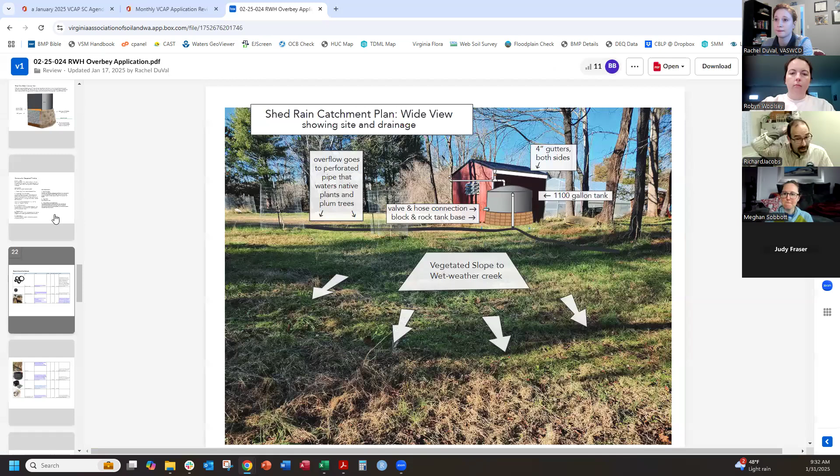Yeah, I went ahead and just took a quick look at this, and the biggest concern I have is the one on the shed, because it's kind of an oversized tank, and then it's elevated, and I think we've had at least one other tank this size that was maybe elevated or had some sort of foundation wall, but because this one's completely elevated off the ground, I was just worried that it wasn't safe enough, didn't have the structural support underneath of it. So for design purposes, I think we have to assume that the tank is full when you're designing the foundation.

I'm not sure if this tank will ever be full, considering that the shed is only like 160 square feet. And I think that only comes out to be about 100 gallons for a 1-inch storm event. So at 1,100 gallons, we'd have to get 11 inches of rain, or not use it. So I guess the likelihood of it being full and having the full load applied to it might be low.

But yeah, definitely the design here, I was just questioning the cement fiber panel sheets, which are also included in the material list and cost estimate, don't seem to be rated for structural loads. I think it's just a paneling material. I guess it's a link to Lowe's, so it looks like it's a panel that you put on the wall of your bathroom to protect against moisture, not necessarily as a floor. So that's one observation for that particular design.

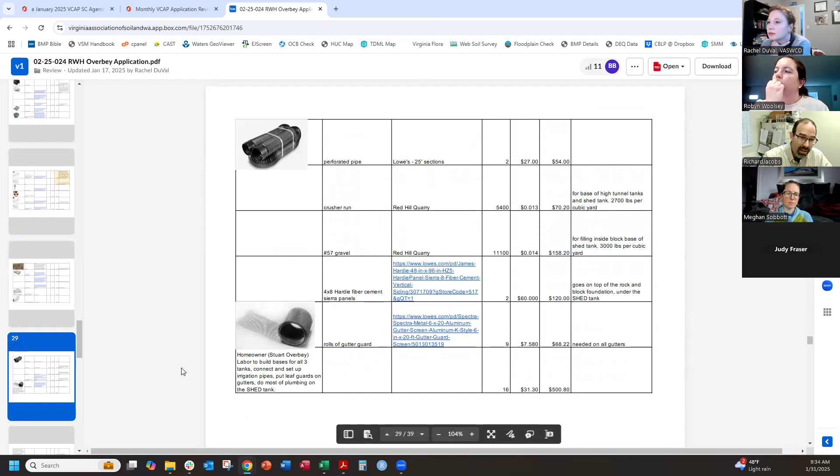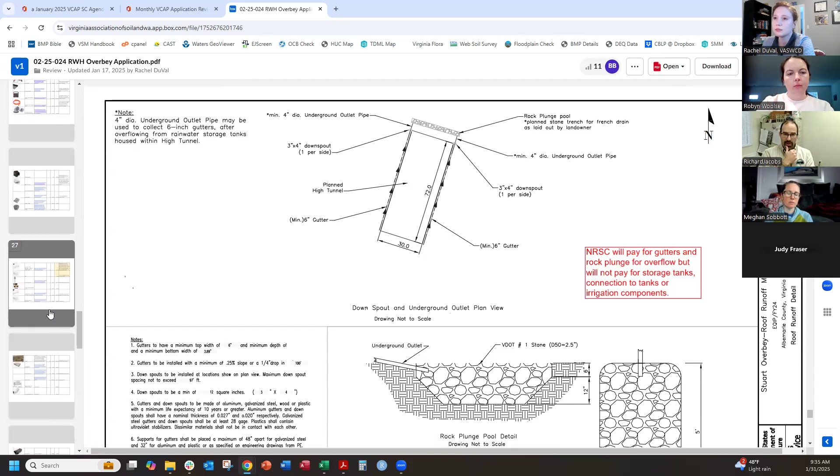And then even the ones that are rated for the floor seem to indicate that they still need some sort of metal structural support. And then the landscape blocks, I just can't say whether that's strong enough for the support. So definitely a different cement board if they're going to keep it elevated, but my preference is to just put it on the ground. I don't think that would affect their use of the water. They would just have the hose and everything down at the bottom, and still be able to gravity feed out.

Yeah, Richard, I had the same concerns exactly. I looked at the block and they're used for retaining walls. I don't know in this kind of circular setup with this kind of load on top. I've just never seen it before. I would want to make sure the manufacturer of those blocks is on board with this use of them and maybe get their engineer involved.

But yeah, I think the cement fiber board will just be pretty much buckled and popped when that load goes on it over gravel. So it's not going to do anything if it is used, it'll just be probably somewhat destroyed. And I don't know why it would be there. It's a really heavy load, like you say, if it ever gets full.

And maybe this goes into the survey, but we do still have these things should be emptied every 7 days. And so the program practice was not created, I don't think, with this intention. It may be fine, but it just does seem to not be relevant to the intention of the program as such a huge tank. But I had one other thing and I've forgotten.

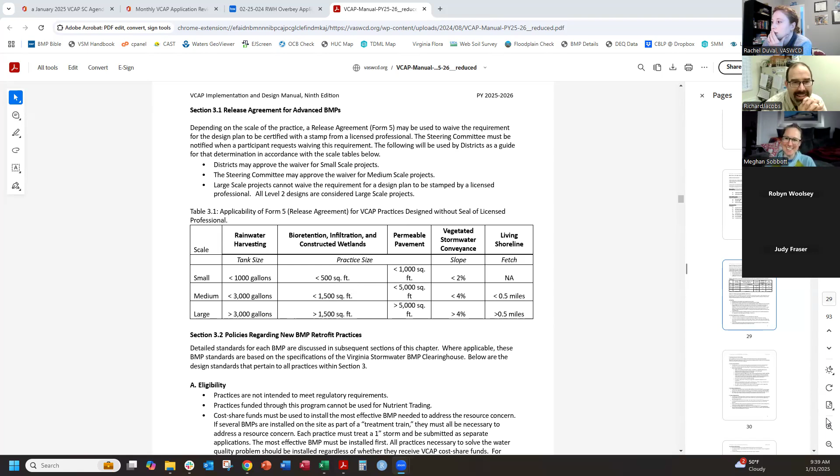I would think that you wouldn't really want it inside either because it takes up your garden space. Right, exactly. Who might argue? It's a big hoop house, so it's not for production, it's for home. I'm pretty sure she's using it just for herself. I think she's not selling agricultural crops.

Yeah. So I mean, it's right there at that threshold where typically we would need to approve the medium scale projects. Oh, there we go. Okay, so that's not as significant. So yeah, on the ground, I'm comfortable with approving the waiver. So table pending redesign to be on the ground and provide a Form 5, or conditional approval.

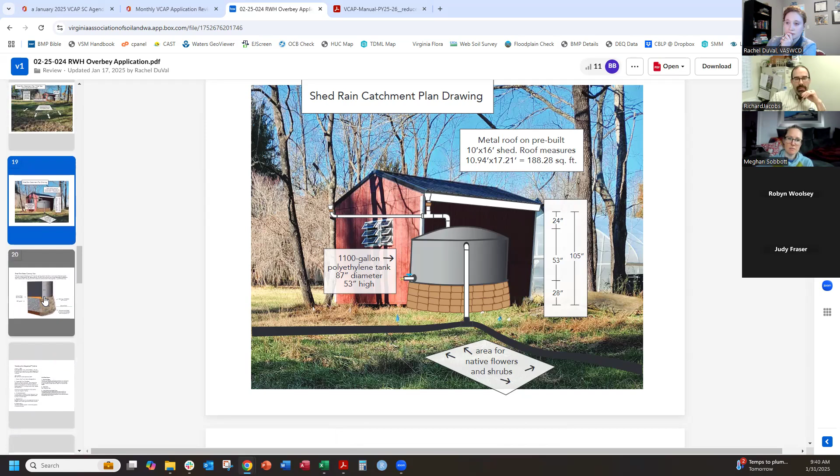Can I ask a question? If you do need a redesign, is a statement saying tank will be placed on ground with 57 bedding stone sufficient as a design, similar to the ones that are inside the hoop house, as opposed to her having to resubmit or redo a form or a diagram? I think regardless, we would need the Form 5 in addition, signed. But yeah, if it can be designed just like what's inside the house, I think that would be. Okay. Yeah.

Okay, so the question is, does it need to come back to the steering committee if the third tank is just going to be basically designed like this and a Form 5 is provided, or is conditional approval sufficient? I'm okay with conditional. Any other thoughts? Yeah. So as long as they know that they can't move forward until the Form 5 is signed, I think that. Yeah.

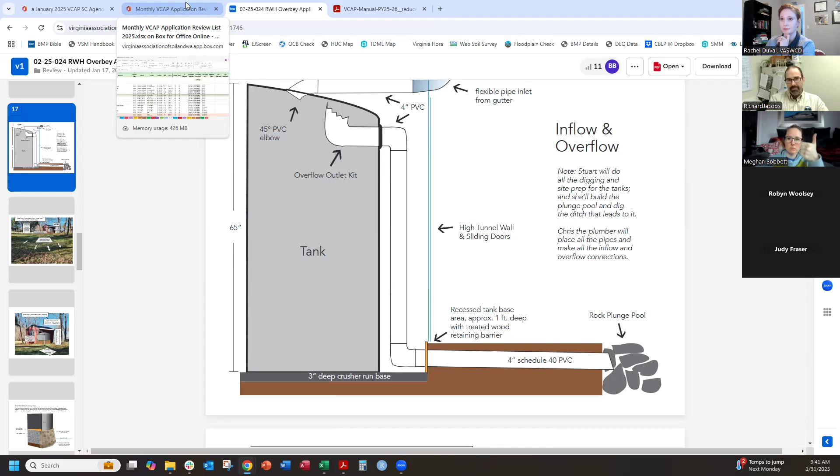See if this breaks everything. Okay. Woo. I actually haven't moved anything on this yet, so that was a little stressful. Okay.

All right, so the next, I'm gonna kind of say two in one because this rain garden and this permeable paver project are quite literally right next to each other. The reason I pulled this is mainly a least cost, technically feasible question. The rain garden is situated here, and the permeable pavers are right next door. The rain garden is treating this section of the roof, the permeable pavers this section. The rain garden is very oversized. It'll be beautiful.

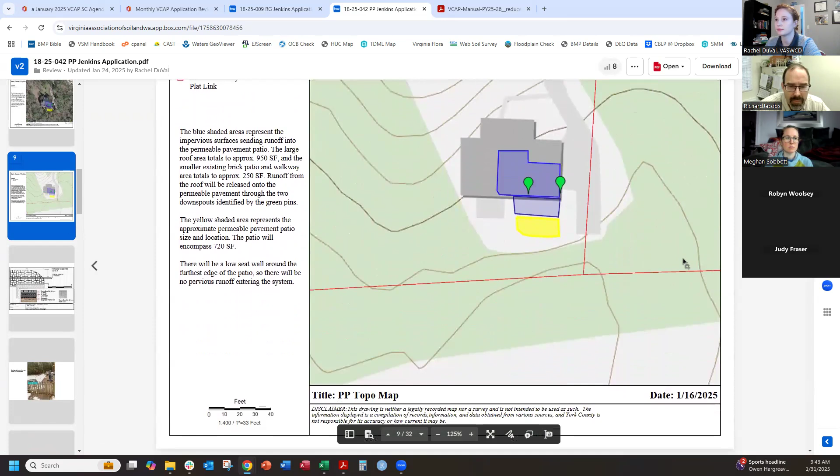But it's sized enough to actually take all of the back roof. So the question really is least cost technically feasible. Do we fund both of these projects or do we say pick one? I'll pull up the other one as well so we can compare. This is the permeable paver project. This is the rain garden.

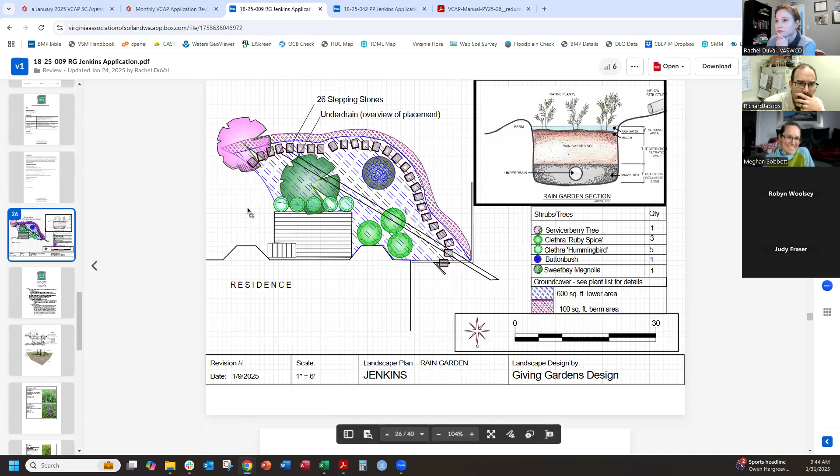Hey, Rachel, what's the concern with funding both of them? The concern is in our manual, and our manual doesn't phrase it like this, but the least cost technically feasible aspect. Are we utilizing the money in such a way that we're getting the most efficient BMP that can treat the resource concern without spending excessive funds on two separate BMPs? Can one BMP treat this?

So functionality wise, there is really no concern with either BMP, and it would look very beautiful. But the question is, does the steering committee want to fund both projects when one could feasibly treat the resource concern, which is excess runoff from the roof and a little overland flow? Sorry, looking at one of those pictures, it looked like one would be treating one side of the house and one the other side. Somewhat. One is treating one half of the back of the house, and the other the other half. But they would both be treating a separate part. Yeah.

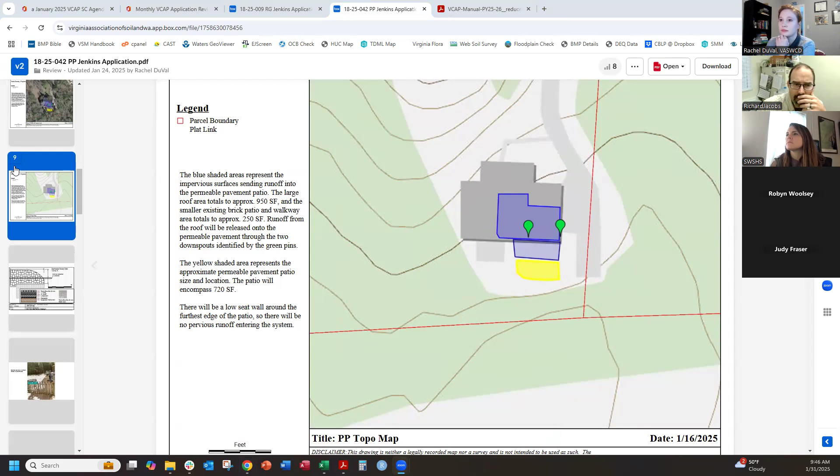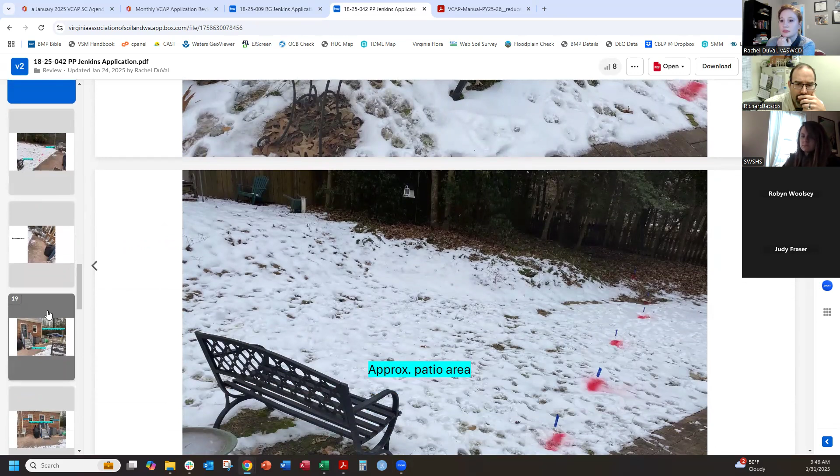Yes. So again, there's nothing intrinsically wrong. It's a question of where we want funding to go. Yeah, from what I can see, and correct me, Rachel, it seems like it would be challenging to get the water from that right side of the roof over to the rain garden. It would involve piping it under their patio and over. I don't know the grade, so maybe it's going against grade. So if they're two distinct downspouts and locations, I think it should be considered reasonable to have two separate installations. And they've got the deck in the way. Okay. Yeah.

So it kind of makes sense to me what they're doing. Just having two separate, if they did two separate rain gardens, or I guess I'd be pushed if they were both permeable paver projects on either side of a deck, but as it is, I think I'm okay with it. Yeah, I agree with Judy. I think sometimes you have site restrictions that are hard to see from photos. That might make it the best option.

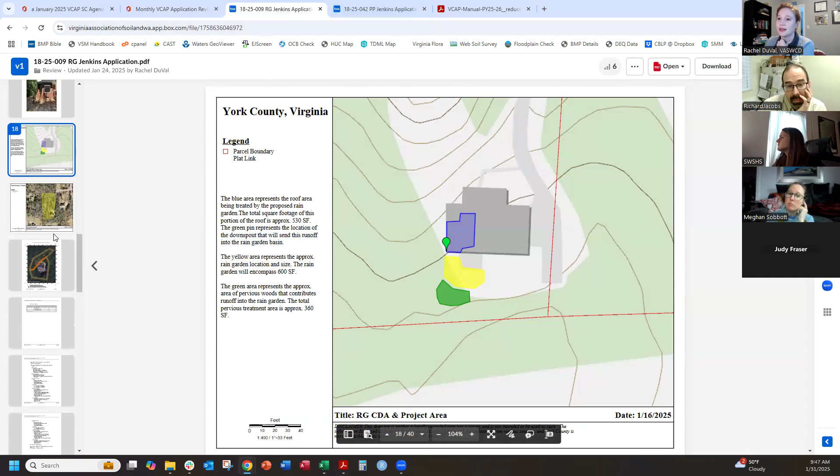Okay, perfect. And yes, just to clarify, the reservoirs are not connected to each other. This is not a treatment train, separate entities, separate drainage areas, all that. Okay. And then I guess for the size here, how big should it be versus what they're providing? On the drawing it says 600 square foot. Yeah, it's huge. I think they only need, oops, I don't know why that happened. It is a 600 square foot ponding area.

They basically just want the landscaping, yeah. They want the resource concern to be treated with a rain garden, but also to fill out. And there are definitely lots of plantings in it. Yeah, so I see that. So I think my only concern, looking at the drawing, is the proximity to the house. They need to maybe exclude the area next to the house because it should be sloping down away from the house at least a little bit. As it's shown, it sounds like the ponding will be up against the foundation. Does that make sense? I can see that.

So maybe we just have to tell them that there needs to be a separation from the house foundation to the ponding area. I don't know how big that deck is, but if the deck is 10 feet wide, then having it 10 feet away from the house would be ideal. So any landscaping up against the house wouldn't be part of the practice. So the depressed area would be 10 feet away from the house. Sorry, Richard, the three bigger green circles would not be ponding areas, and everything else could be those ponding shrubs. Yeah.

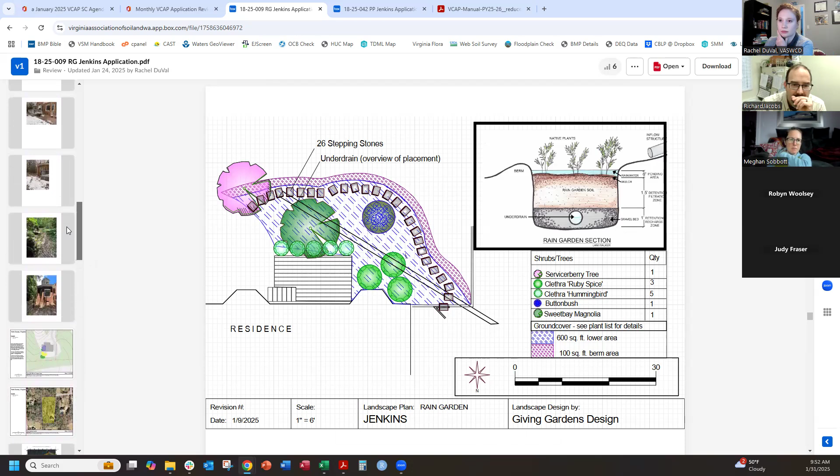But both of these practices are treating the same resource concern? Yes, excess runoff, just different contributing drainage areas. Some of the pictures are snow covered, so it's hard to see what the ground cover is like. It's not really a lawn space. It's mostly weeds, general turf weeds. It's pretty shady back there, a lot of water, so just a poorly performing yard. So the pavers are intended for excess runoff, and the rain garden provides vegetated cover as well as addressing runoff. Those pavers we're looking at are staying; the new patio is in the grass beyond it. Existing patio to remain.

But I think generally, since it's oversized, we should reinforce the 10-foot setback from the foundation, and not pay for any foundation plantings within that zone, and then have it depressed 10 feet out, and that would be fine. Was the infiltration rate pretty good here? No. Robyn, correct me if I'm wrong, I'm pretty sure it's terrible. That's why they have underdrains in both. It's real bad, 0.2 inches per hour on the sizing spreadsheet. So it's a media-filled rain garden.

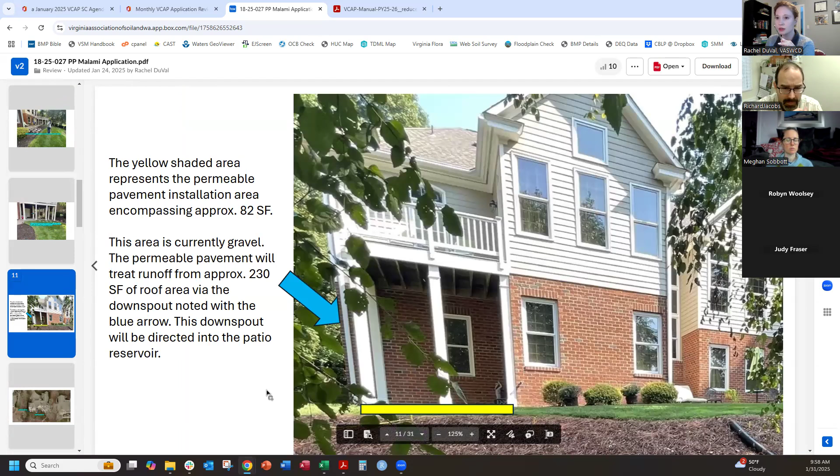So around the edge of the reservoir, where it abuts the foundation, they do have an impermeable liner or non-woven geotextile. But in this area in particular, and I think in the front as well, there are posts and they are set in concrete, but the idea is that they would like the reservoir to go kind of around these. So thoughts about that?

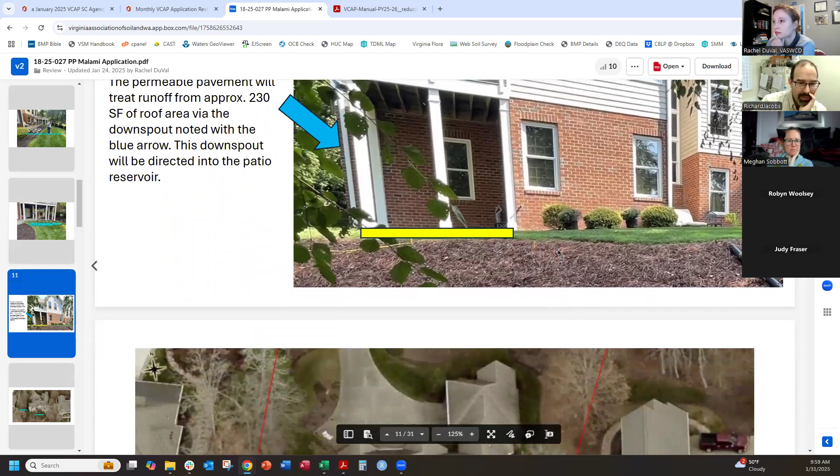So the pavers themselves are going to extend under that, right? The drawing was kind of. But not the pavers themselves. The entire reservoir is planned to be in the paver area, so underneath this portion here. So they're excavating around all those columns for that deck to put in a reservoir. How deep is it? But there's no pavers on top of the reservoir.

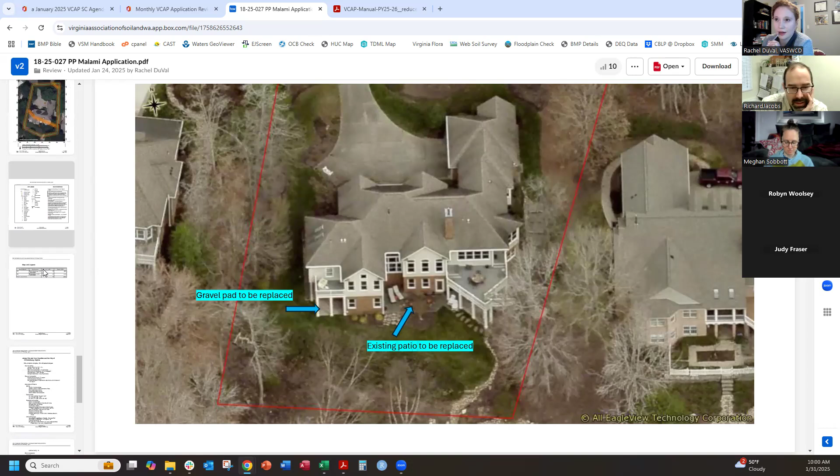Yes, there are pavers on top of the reservoir. Okay, so they're going to extend the pavers under the decks. Just worry about compromising the footings of those columns. But actually, I'm sorry, I'm scrolling so fast. And is there water coming through the deck?

It is, Robyn. It's going under the deck because that's where the downspout from the roof releases. So that's the main resource concern there. There's probably some water coming through the deck, but that wasn't the real issue. Okay. I know some of these elevated decks have internal drainage systems, so I wasn't sure if there was a separate downspout for the deck. No, not that I was aware of. Okay.

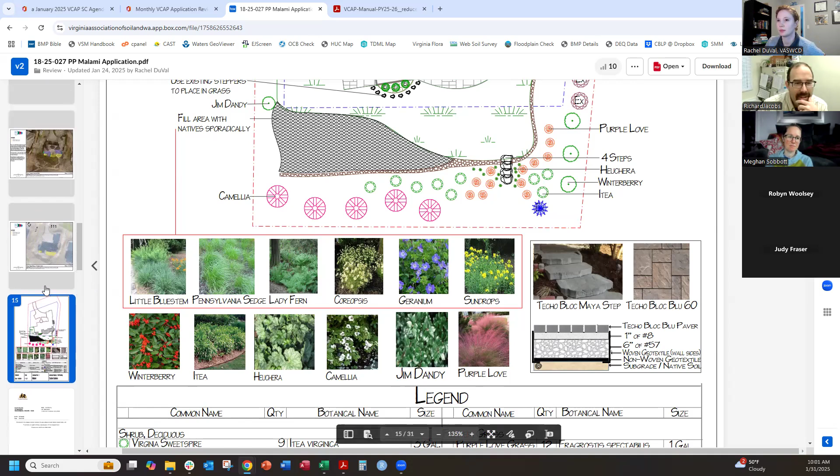But, I guess it could be done, but I mean, the reservoir is under the whole thing, right? It's not just being shunted under the deck, right? Correct. Hmm. How old is this house? Well, big.

I'm always a little leery about decks, honestly. I think typically there have been questions about this type of reservoir around a deck or under a deck before, and it was just wooden posts. So this is a little different because they're wrapped in concrete, but they're not just putting the pavers on top. They're actually going to dig into the existing gravel underneath.

It would just be a lot more comfortable if they just piped that downspout to the area where they can excavate without endangering. We don't know how deep those footers go for the columns. If it was built at the time of the house, they're probably 2 feet down, and maybe it's not going to be an issue for a 4-inch. I just wouldn't do it myself. I'd pipe the water beyond.

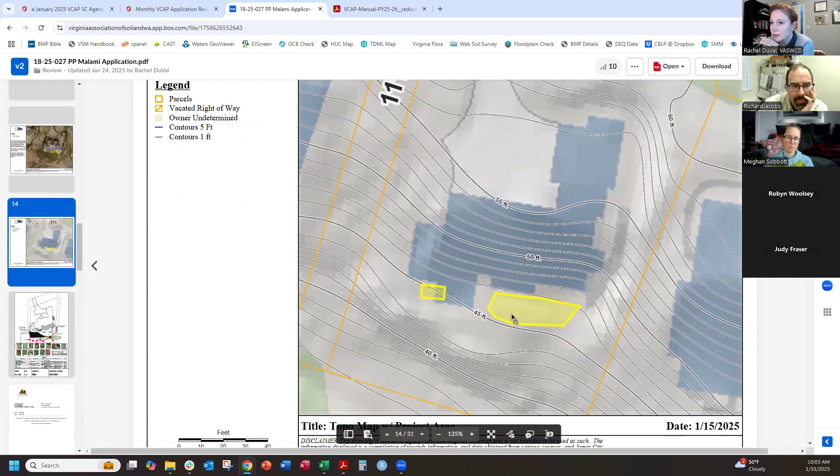To kind of this area where they're... Yeah, I mean, it's a big, right, this side. Yeah, just the reservoir area just not be under the deck. Not that it can't infiltrate or put pavers on it to make it look continuous. And I'm sorry, I missed how deep their reservoir is, so they're going down 10 inches. Yeah, 9, 10 inches.

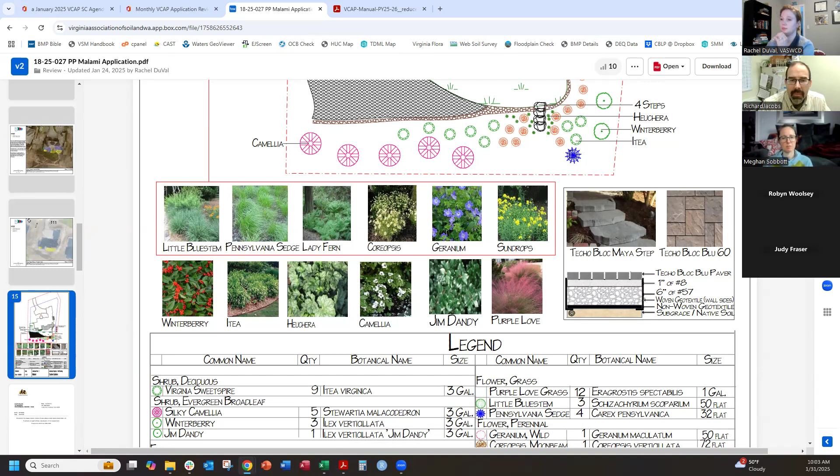I mean, there should be footers that are 2 feet deep anyway for the deck. So that's going halfway down, removing the soil from around those columns. They're signing a Form 5, so they're taking that liability on themselves, but I wouldn't do it.

That middle roof area is just piped somewhere else, I guess. Yeah, that's funny. Where does that go? They didn't have a direct downspout on either of those little sides of that roof. I forget what you call that. So we just didn't count it because it wasn't going to be directly into the reservoir. Probably ends up there. That's a safe assumption. It's got to go somewhere. Probably just rolls off a little more dispersed than the downspouts. Okay, but I guess the reservoir, that middle portion is also.

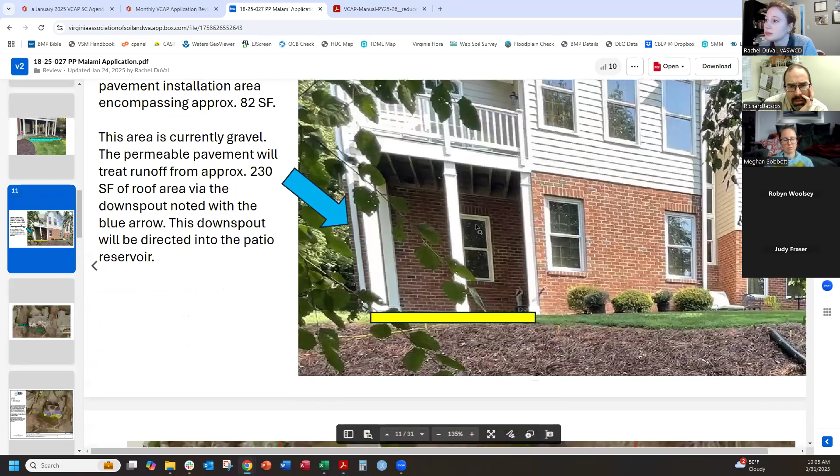So is there a basement on the back, or is this the walkout basement side? So can you go back to the pictures? I think it's just a walkout. It sort of feels like it would just be, yep.

Sorry, you said basement. I was like, we don't have those in Williamsburg. No.

Yeah, so there's not a subterranean wall that this is going along or anything, so I think it's fine. The barrier between the wall and the reservoir though should be impermeable. That is noted.

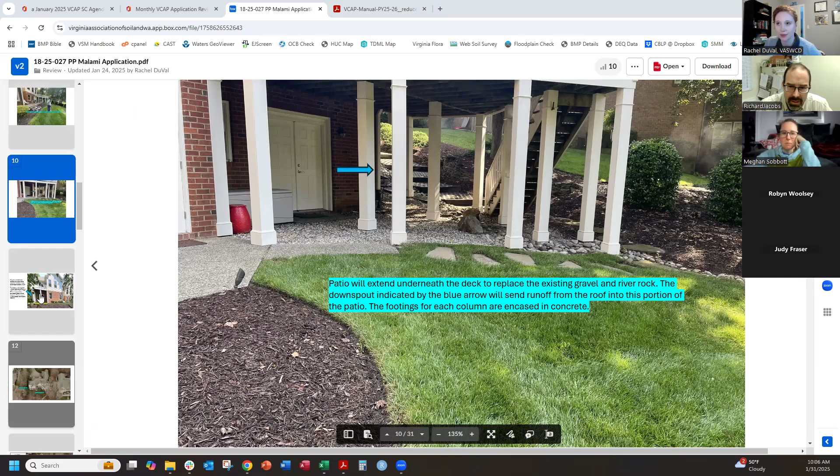So my question is, what are the recommendations to take back to the homeowner? Is it to stop the reservoir? This is hard. Hold on, let me find this picture. Put the reservoir in this area and just use pavers to match here to avoid digging around the posts. Would that be acceptable? And does that require coming back to the steering committee or not?

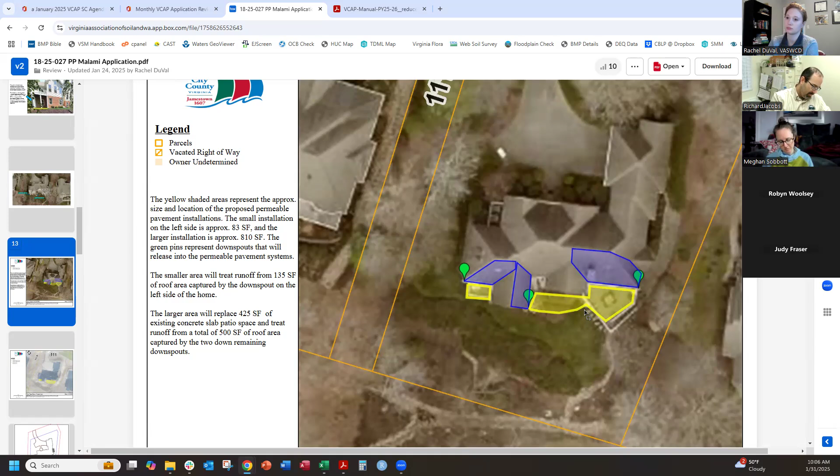Well, again, they're submitting a Form 5 with this, so they're acting as their own engineer, and I don't think it's our place to, well, maybe it is our place. We require the Form 5, but I would say the best solution would be to suggest that they size that central area for a reservoir that will accommodate the roof runoff and pipe it over there. But that would mean coming back with a slight redesign that also maybe includes those other little gable roofs.

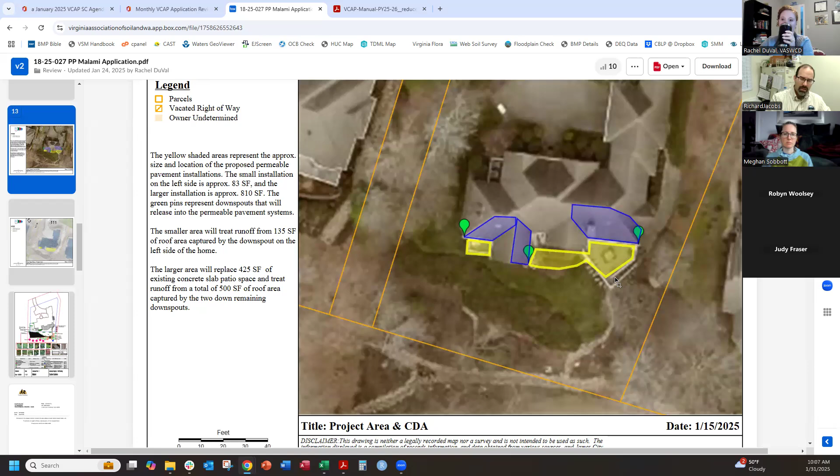But if they are determined to do it this way and feel very confident they've got 10-foot deep footers under those columns and whatnot, then that's where the Form 5 comes in, and they could go ahead. So I guess, I don't know, would that be conditionally approved with that recommendation?

Given that, if they want to proceed even despite that concern, that's their choice. I see Richard thinking. Yeah. I mean, we've paid for under decks before. I don't know. It's not so much that it's hitting the pavers in this case, it's what's being piped from the roof. So, yeah.

We can do a dry well under the deck. Please no. No, but the dry well would go deeper than the pavers, so that would be even more of a concern for the foundation. I mean, the posts of the deck, I would imagine, go down at least 2 feet. And they're only going down 9 to 12 inches, because there's 3 inches of pavers, some bedding material, and then they go down 4 to 6 inches more. That's going to be 9 to 12 inches.

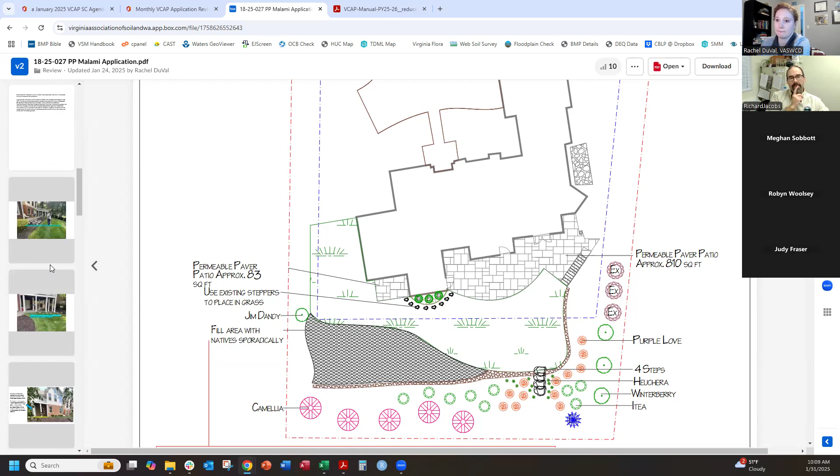It is gravel now, right? Yes. I wonder how deep that gravel is, because if they just take out enough gravel to put in pavers so they line up and it's just not a reservoir, it's not that big an area. Yeah. I just don't see a real issue. Just say move the reservoir, kind of like with the rain garden on the last one, out of that critical area. It's still going to have gravel, still pervious pavers that water will flow through. It just won't hold water down there. And they won't have to excavate that deep. I hate to speak for a landowner, but I think they'd be fine with that.

Would that be excluding the area from cost share, or just making it shallow there? If we're going off of precedent, since there is nothing in the manual outlining how big the reservoir needs to be in proportion to the surface area of the pavers, we would pay for those pavers as well. Well, I think there is a minimum depth for the reservoir in the manual. Yeah, it's 4 inches.

But I think maybe the downspout should be piped into the main section away from those footers, away from the deck. Is that what we're recommending, that the downspout would be piped all the way over to the other side of the deck? That's what I would think, given that if it can hold that water, then it just gets away. That was their concern. Okay. It sounds like Robyn was saying that they don't want that water under there.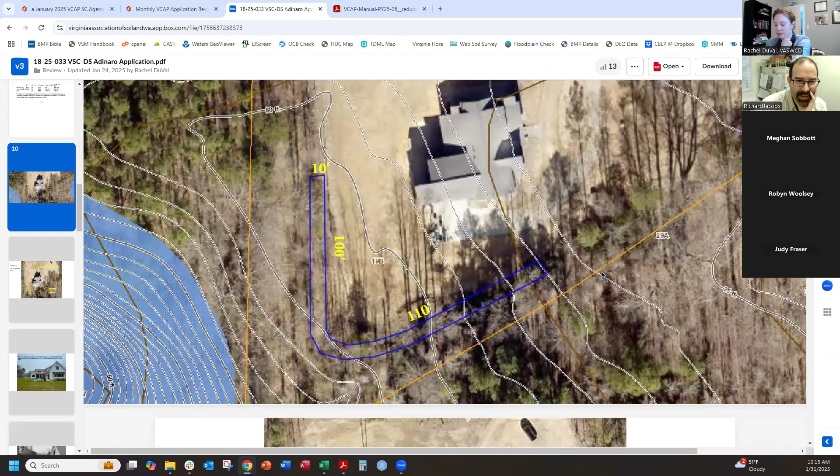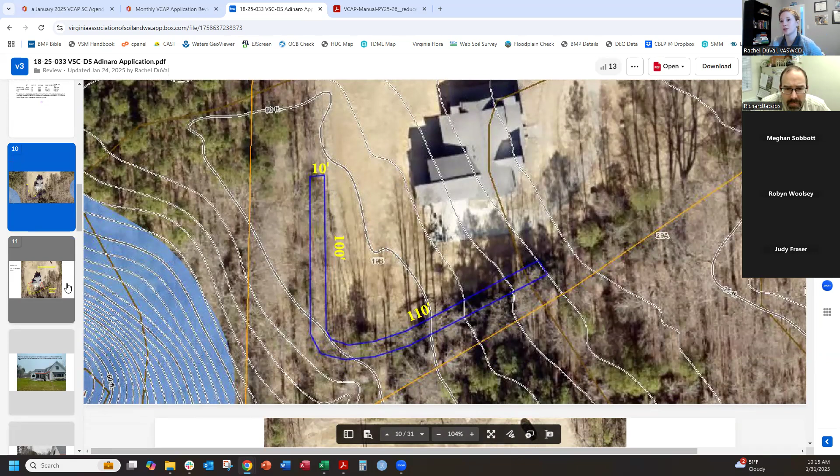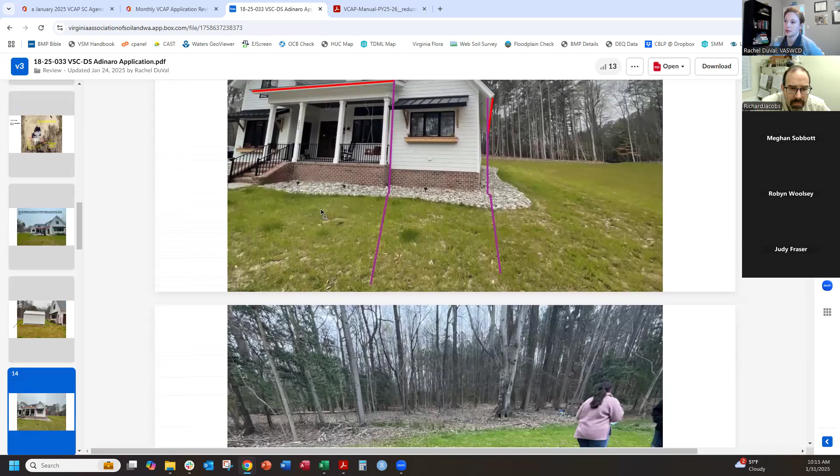So this is one that came. This has gone through a couple of iterations, but this is a dry swale that will be this. It's proposed to be this kind of bending area, the whole length of the swale. This is the swale itself. It's taking downspouts from multiple downspouts in kind of different areas. The cross section, let's see. Sorry. Okay. This is kind of the cross section here.

So 2 foot wide, I think they call it a drainage ditch. It'll have an under drain in it, choker stone, filter media, and then slope down. It'll be collecting those 4 downspouts, and it's going to be seeded with, I think, turfgrass. Again, it's gone through a couple of iterations, so there's some confirmations that are needed, like the fabric needs to be non-woven. It doesn't specify that. The filter media, confirming what that is composed of. And then,

Robyn, I'm not positive if they decided to put in a final weir or not. Sorry, I cut you off. No, go ahead. I'm sorry. It was a little jumpy. No, it's okay. Forgive Colonial District this month, you all. We had some challenges.

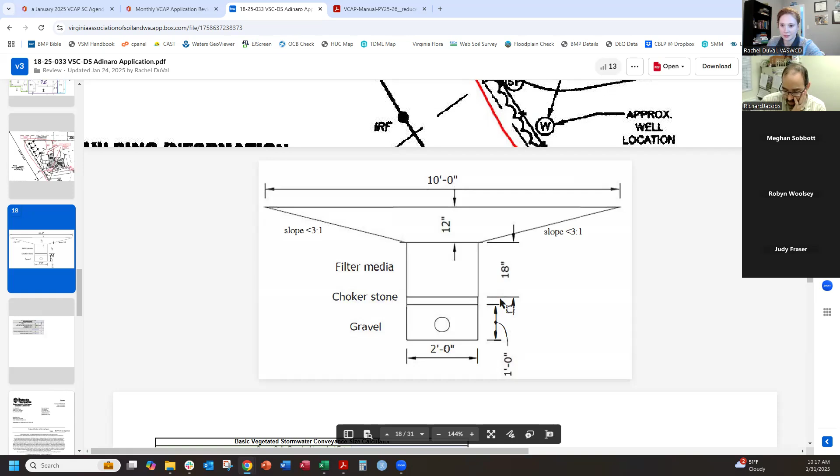As it stands currently, the landowner does not have a final weir proposed. His reasoning is that the swale itself is so oversized that the amount of overflow is extremely limited, even in large storms. So he doesn't have one in now. We've talked about it. He said if he really has to, he will. I don't know why this is the hill he's chosen to die on, but that's where we're at. Thank you, Robyn. You're welcome. I'm sorry, I don't know a thing about swales.

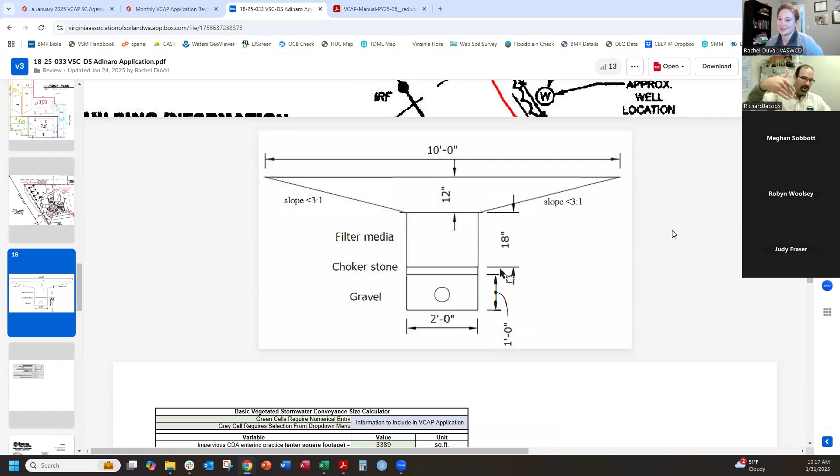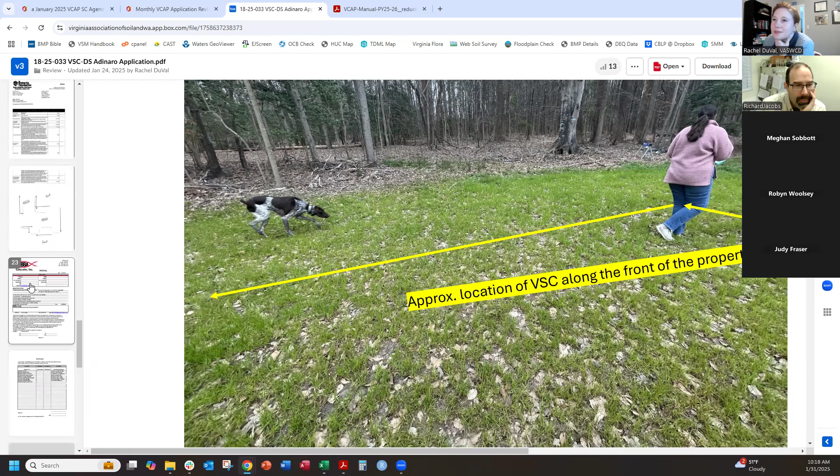No, don't apologize. And the slope of the channel is pretty flat then? Yeah, very flat. Do they discuss how much fall they have? The one I did had very little fall, so we barely made it work. So I wasn't sure if this was the same way, whether you had like 6 inches of fall or if you have more. I don't think that was shown. Let me scroll. Yeah, I don't think he has that specifically. He was just going off the clearinghouse spec of having the correct slope percentage when it's installed. I think he refers to the spec, but I'm not positive. Maybe here.

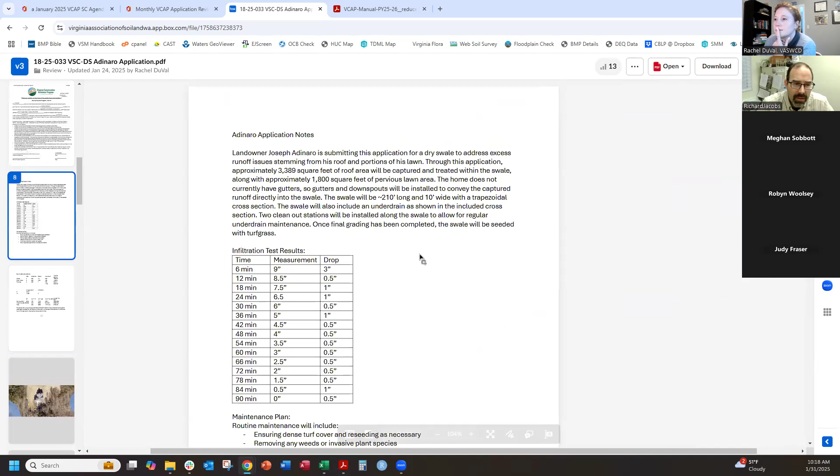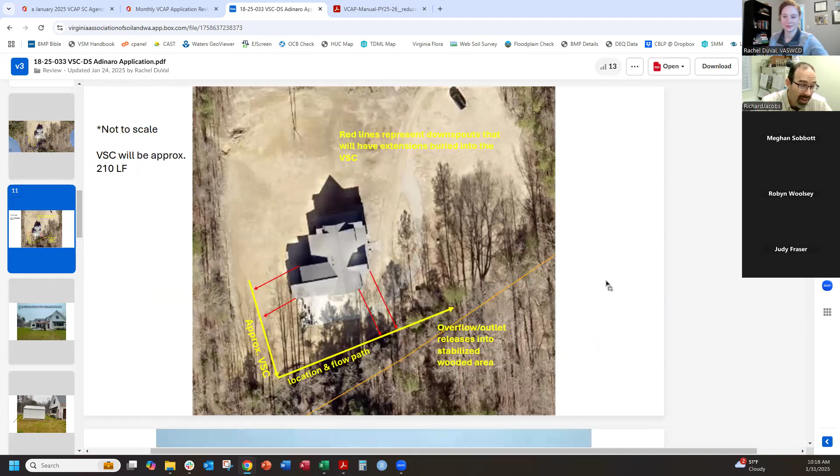And did he do a lot of the design himself, or was it the contractor helping him? No, he did it himself. Form 5 is included. Yes, it is. Is he building it himself too? I think it's going to be a little mixture. He's got a contractor to install some gutters. I think he's going to maybe rent some equipment and try to do some of the excavation himself, but not entirely sure if he's got someone else in mind to come in and finish it out. Yeah, there it is. Okay, ABBA concrete.

So, guidance wise, and again, Robyn, please say stop. No. Effectively, this came through in November. It wasn't particularly complete. There were some things missing. Went back and forth with the landowner, and he doesn't really want to change certain things, like adding in a final weir. So mainly, Robyn, how can we support you, what feedback do you need so that you can take it to the homeowner and make progress on this? That was kind of a statement, but mainly a question. Robyn, what would you like to see with this application? How can we support you in moving this one forward or not?

Yeah, I think a traditional steering committee review is great. I think we just got to the point where he wanted it to get to the steering committee to get whatever feedback you may have. Certainly he wants it to be approved. He wants to proceed. But really, I just wanted you all to see it, review it. If you've got feedback, I'll take it back to him, whatever's best.

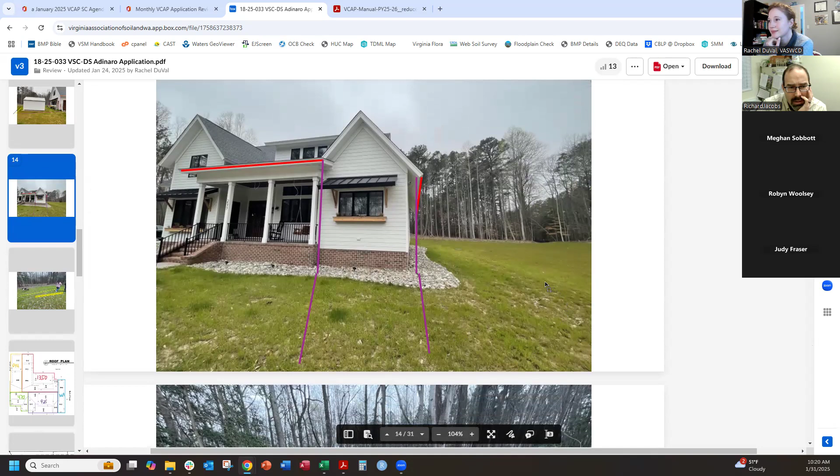So he's adding downspouts and channelizing flow that isn't currently channelized. Am I understanding this right? He is definitely adding downspouts and extending them into the swale. So there's not a swale there now. There's not a natural flow there now, or I mean, the property is graded such that in a huge storm, I think you'd see water moving that way. But he just wants to have an opportunity to take that water from the roof and move it into that swale to keep it on the edges of the property.

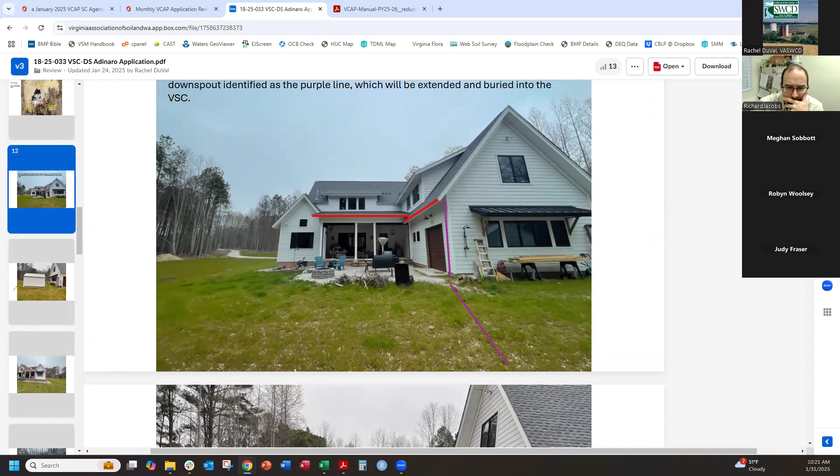So I guess my first question would be, is this the most cost-effective approach from the program perspective? Seems like he's got land and area to manage that water in typical situations. I'm not quite sure why the VSC is called for here, given that it's a fair amount more expensive than other options. Robyn, would he be opposed to something like a dry well instead? I would imagine he doesn't necessarily want plantings, but he might.

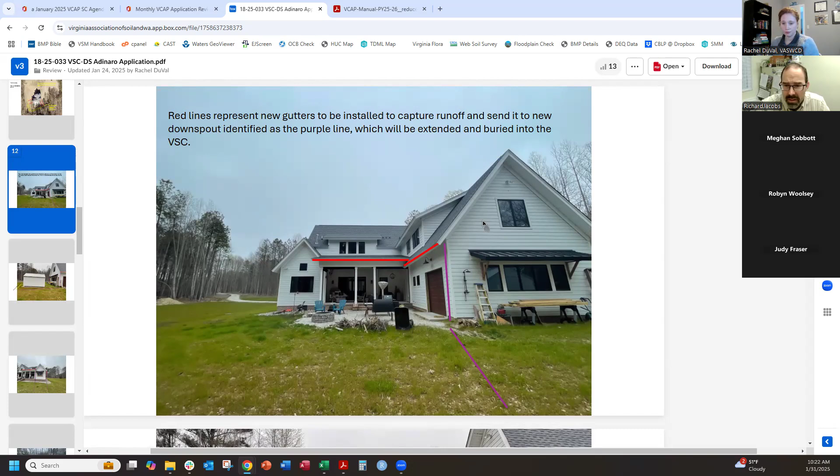I don't know. Yeah, we had initially talked about a rain garden or several rain gardens around the property to try to address these different areas. And it really doesn't seem like he is interested in that vegetated of a practice, because he's just seeding this one with turf anyway. And then I don't know that he has the depth to water table for a dry well. Okay. And just conservation landscaping of a very low maintenance type wouldn't work for him? He doesn't want to put any plants in the ground. I don't know. He got taken with this idea of making a swale of some kind. Yeah, he loves a swale.

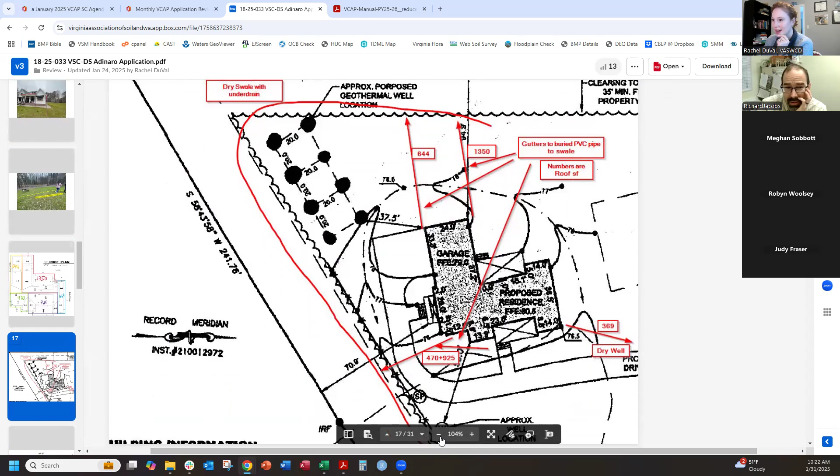So there's a drawing here that shows an existing swale, right? Was that never built? Because that looks like the construction plan. I genuinely don't know. I'm sorry, where are you pointing to, Richard? Well, on this construction drawing, it looks like there were supposed to be existing swales. Where are you talking about? On page 17, you have this plat and there's contours. Looks like there's a swale going off to one side, a swale going off to the other side. Like this one? No, not the red line, but those V shapes. I see.

I don't know. I mean, nothing was particularly obviously a swale on site, so I'm not sure. Sorry, go ahead. No, it's okay. I kind of see it as very gradual. It's very flat, but basically the ground is graded up to the house, and there's a little bit of a light swale on that area. It's not nearly that distinct as shown in the drawing.

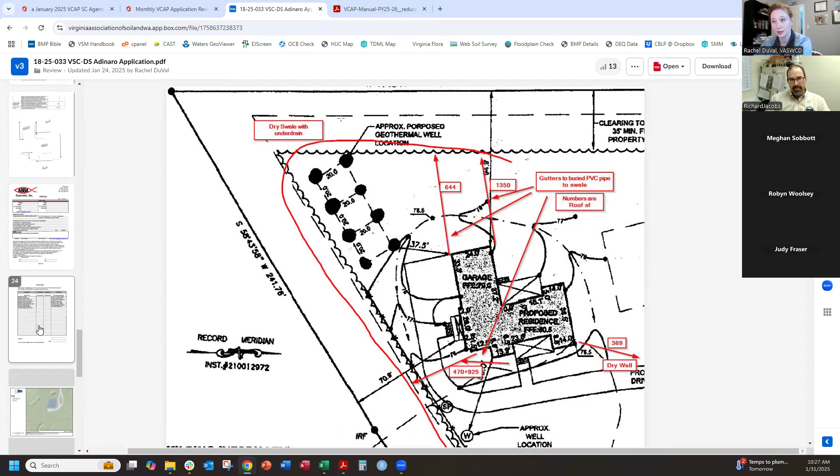But we have required density and minimum ground covers. Am I misunderstanding that? Suggested spacing, so yes and no. We never updated the VSC spec, which is on the agenda for the remainder of 2025. So we're kind of yes and no. But we haven't really approved any swales that were grass lined. Usually they would be sedges or rushes, something other than just turf grass. Okay. And then there should be a check dam, at least at the outfall.

Yes. I just don't think it meets our criteria. So it's questionable whether it's the right practice, and it's not meeting the criteria of the dry swale spec. Okay, so it's a vegetated stormwater conveyance. And if we want to change it so we allow grass, like you say, that's a manual change.

Aside from the details of whether a weir is included, design-wise, is there something that can be changed or added in a full design that would make a VSC appropriate here, or is this just not the right practice for this place? I don't think it's the right practice. That's my vote. Any other thoughts on that? To go back to the landowner, I need reasons why it's not the right practice. He spent a lot of time on this.

Well, what's the resource concern? Excess runoff? Yes. Well, I think it's too far away from the location of the runoff. He's piping 1,000 feet in one area, 500 feet. I think there are some existing swales out there already. It looks like there's something taking the excess runoff away already, or there's supposed to be. I'm definitely concerned with the utility conflicts with the geothermal wells.

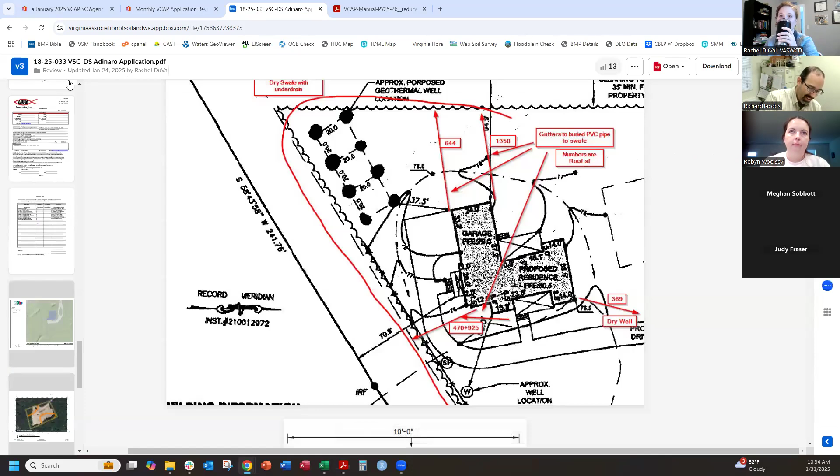Until that is changed. Well, maybe it needs to be a native turf grass, so something like a fine fescue would be appropriate. Yeah, I mean, if we require green roofs to have native plants, we should certainly require dry swales to have native plants. Well, further in the criteria, it says it needs to be native plants. Right. So yeah, good point. It'd be purple top, turf grass, I guess.

Oh lordy. Okay. Yeah, and I think this points out why we need to get that practice revised a bit to be more specific to what we're looking for. Yeah, absolutely. So we can take some blame for that as a program. And of course, early on, we were allowing grass swales back during the pilot stages, I think. But yeah, we should do better than just grass. We can do better than this.

Okay. Let me note that. Hopefully he doesn't go to his legislator and complain about our program. But I think to me, the easiest response is it's an expensive proposal for what is not an expensive problem. From my perspective, there's simpler ways to deal with roof runoff on a large property. Mm-hmm.

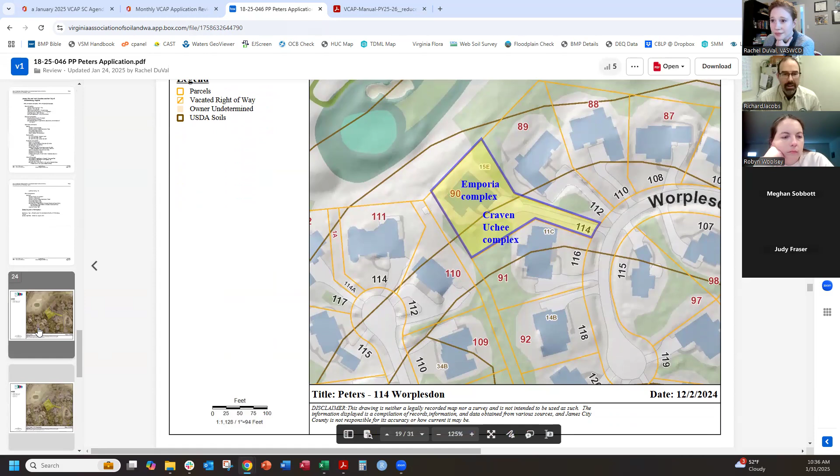Okay, one more. All right. This is a very small permeable paver walkway to treat erosion along a home. Let me find the design. I'm sorry, it's not up there. All right, that is the property. The purple is the design. And like I said, very small permeable paver walkway. The area is not currently impervious, but it is treating roof area that will be piped into that.

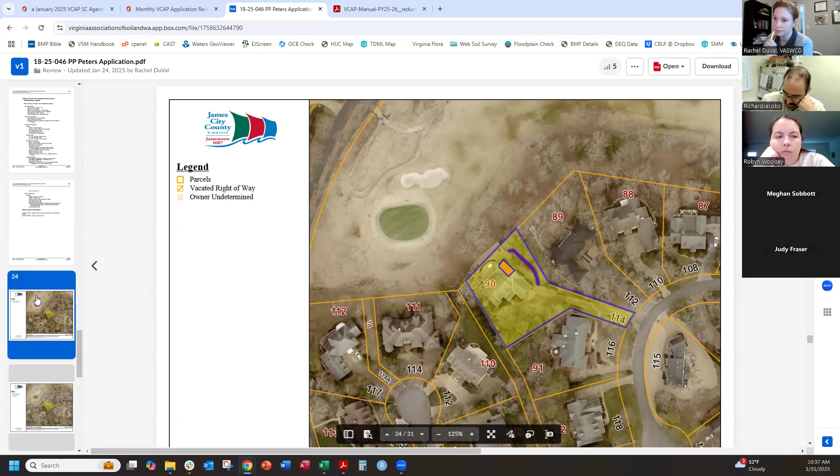So yeah, sorry, I asked for this to be pulled, really just to get a little more information on the application. Maybe I just missed it, but it says 200 square feet, it doesn't say how long it is. So I wasn't sure how wide it is and was trying to puzzle through how that bit of roof is going to be moved through a very narrow linear path as shown here.

So the roof water is in that top right corner, sort of where the bay window is shown. And I guess it's going to be piped in, but that didn't seem to be in the cost estimate. And then they're putting woven fabric on the sides of the excavation and non-woven on the bottom. So I guess mostly it was the width that I didn't see. So how does the water enter and fill the reservoir? That was my question.

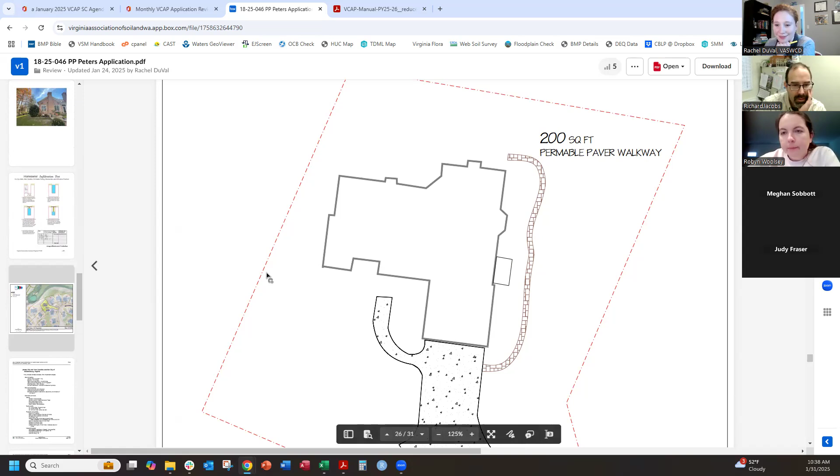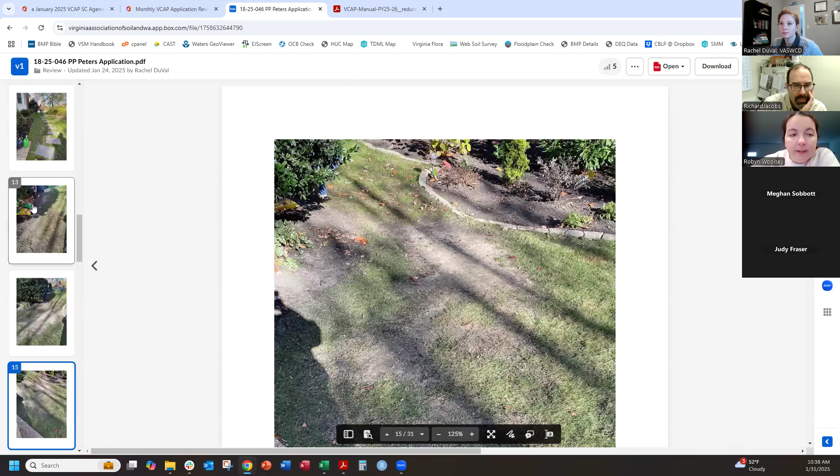Robyn, is there? Yeah, sorry, go ahead. No worries. She doesn't specify a width on here. It's a very narrow space in general between the home and the landscaping she has currently, so I wouldn't expect it to be wider than 3 feet, whatever your traditional walkway space is. And then they were planning on just burying the extension into the reservoir. Okay. The woven fabric on the edge of the practice is because it's within 10 feet of the foundation.

Oh, so it's not on both sides, because I think the plan is only on the house side, but I could be wrong. Right. That was all I had. Okay. Other than stabilizing the construction area, that was my other note. Okay. Did that sufficiently answer your question to approve? Would you like to see this back at the steering committee? No, that's fine. Okay.

All right. So that was the end of the review. Let me go back to the agenda.